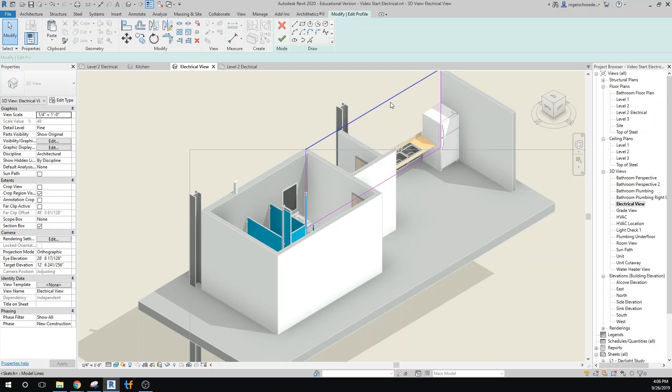And I'll go to, let's see, set the back. Nope. There we go. So what I'll do is I'll pull this line back, just so we're on the front edge of that, and I'll add another line, just heading down. Just give a little bit of backsplash, and then I'll put a curved line between there and there. We don't really need to be up at 9 feet here, so let's go ahead and pull this down.

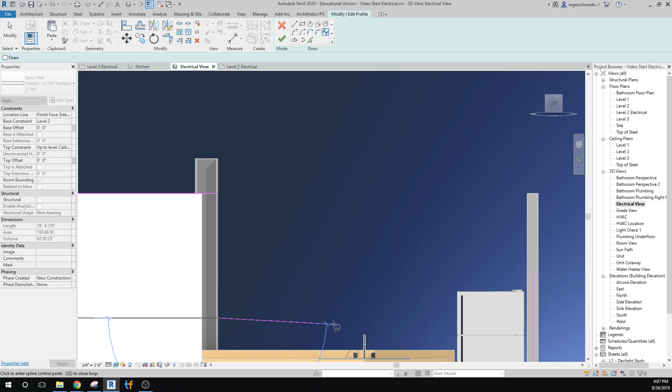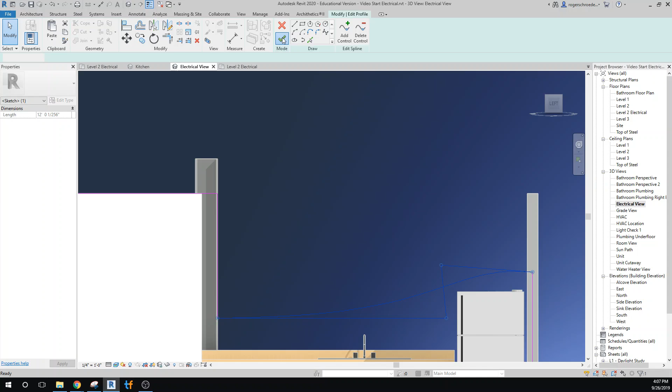Let's pull this down to just the top of the refrigerator, 6 feet 2. And I'll probably dip this down just a little bit more. Let's go 4 foot 6. And then we'll just connect it with a NURBS line. And then we can go ahead and maybe just give it a little bit better shape. And we'll do the same thing when we get to the other one over on the other side. So we have that curved.

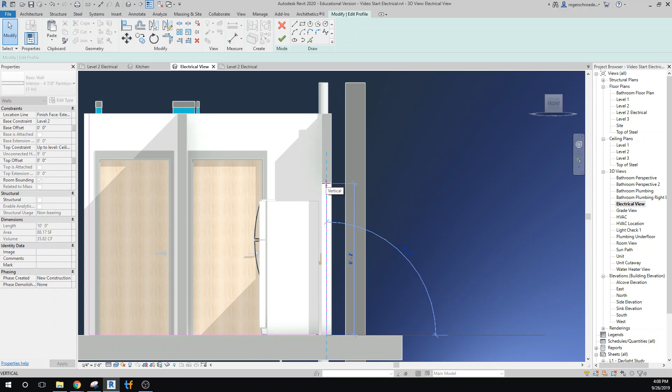Now let's go over to the other side and click out of that mode. And then click into this one. We'll delete that line. We'll pull this line down to the top of the refrigerator. Oops, let's zoom in here. I think that was 6 feet 2. And I'll pull this one down to 4 feet or so. And we'll connect it with a NURBS line.

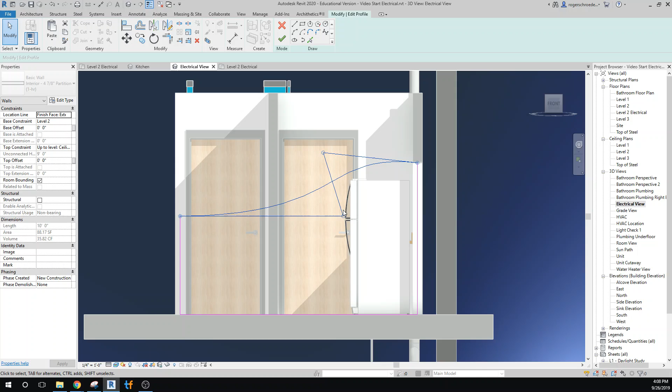And once again, and we'll see how that looks. Anyway, that gives us a little more visibility through the whole thing. That's probably a little goofy looking, especially with this little wing wall coming out, but I won't fiddle with it too much. I really want to just place our electrical here. You can do some rearranging here as you see fit. Really no reason for this wall to be that long. We'll pull that back.

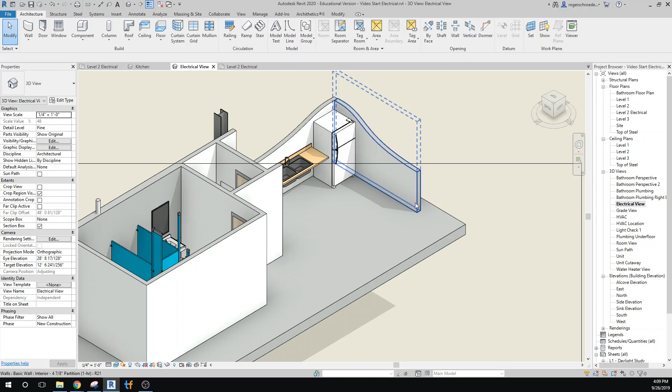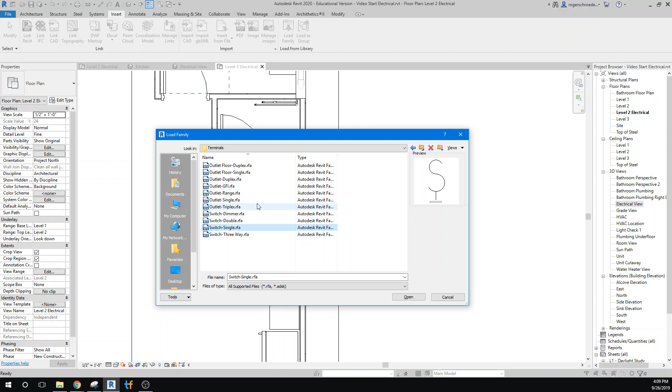Okay, so now let's go to our electrical plan, our floor plan level, and we're going to go ahead and place some electrical outlets. So we'll probably need to load those in. So I'll just go through that process. We went to Insert, Load Family. We'll go out to Terminals, and we'll grab the things that we need. We want to grab a switch, and we want a ground fault circuit interrupter, and I guess we could grab a duplex, but I think everything we're going to put in will be indicated as a ground fault circuit interrupter. So I'll click Open.

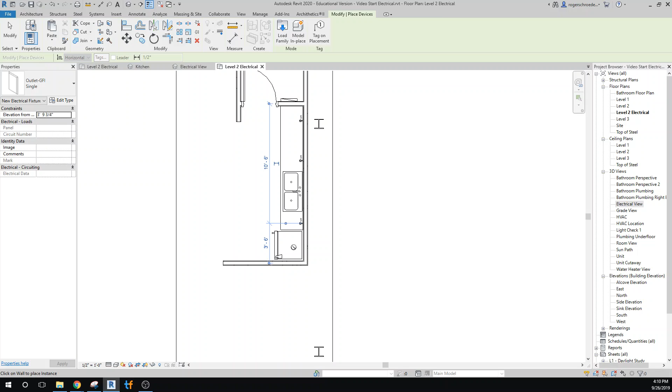And now we can go back to Systems. And we'll go to Device and Electrical Fixture. And we can actually place switches and outlets here. So I'm going to go ahead and grab the ground fault circuit interrupter. And we know we want to be somewhere next to the sink. And we probably only need 2 here. The maximum spacing is 4 feet. We need one here. We probably want to stay a little bit off the edge, but there doesn't seem to be a code requirement for how close that is to the sink. And then we need one actually behind the refrigerator, which is just a separate supply for the refrigerator. So we've kind of added enough outlets here.

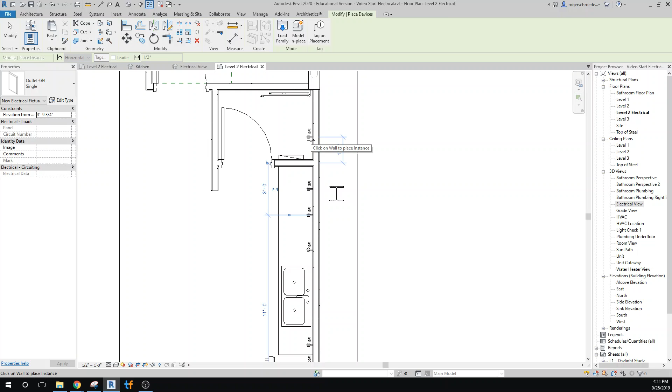We probably want to be generous with this, and actually let's go back to the systems and we'll put in, oops, didn't mean to do that. We'll put in another fixture, put in another ground fault circuit interrupter there. Doesn't hurt to have one in the utility room, and we are required to place one near the sink by code, the residential code anyway, and that would be for shavers and actually for other cleaning appliances that might be needed for that room.

Now we need some wall switches. So let's go back to our systems and grab devices, lighting. Oh, actually, let's approach this differently because we don't have our lights in yet. So let's go ahead and just put electrical fixture in for now, because that'll allow us to grab a switch. And I'll grab a single switch, and you'll notice that it'll only allow us to place it near the wall. We'll place it there on the entry to the bathroom. We probably have a little bit of an issue here locating that. We might want to slide our panel box over a little bit. Now we need ample clearance in front of our panel box for service. I think the requirement is 3 feet.

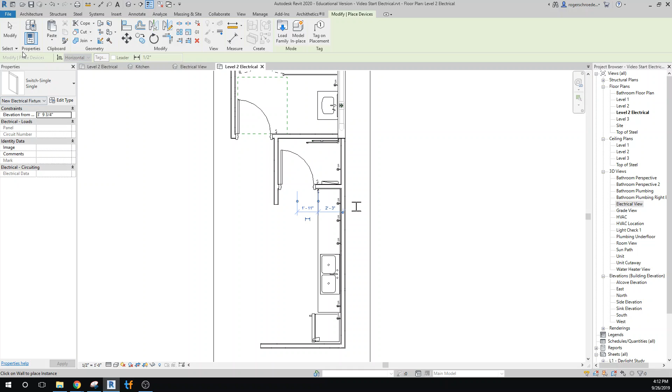And we need a switch for the lighting in the kitchen. So let's place a, systems. We'll place a switch over here for any overhead lighting that we would attach. So now we have basically done our layout, and I think what we want to do is just make sure that we're conforming with code. So we'll just look at putting some dimensions on here. Probably hide these in view because they're going to get in the way.

And we'll go to annotate. And we'll just take a look at what we have here for our, let me tab, see if I can catch that. I should have set this as a chain. I don't know why it won't chain. Anyway, so we'll do another one.

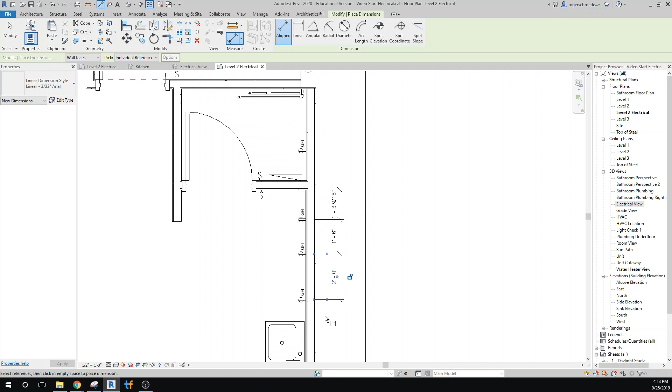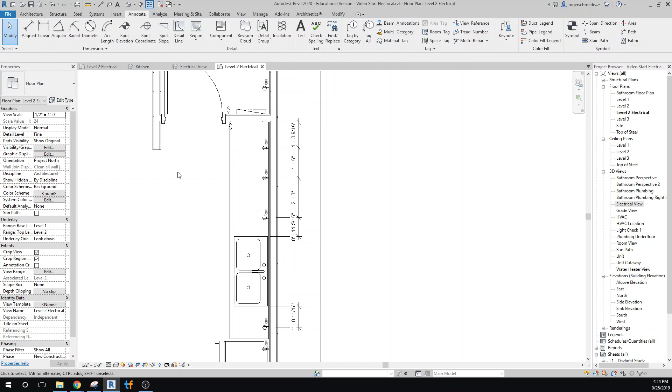And this one. And we're not required to have anything behind the sink. So now, in this case, we're just chaining these off so that we make sure that we're meeting code. The one thing I'd like to do is probably just change these drawing dimension standards a little bit by the amount of accuracy that they have, because we're pulling off these 1/16 of an inch.

So let's see if we can actually edit this type and see if we can change accuracy. Tick mark. I can't see that now, so I'll look into this, and when we pick up on the next video, we'll discuss that.